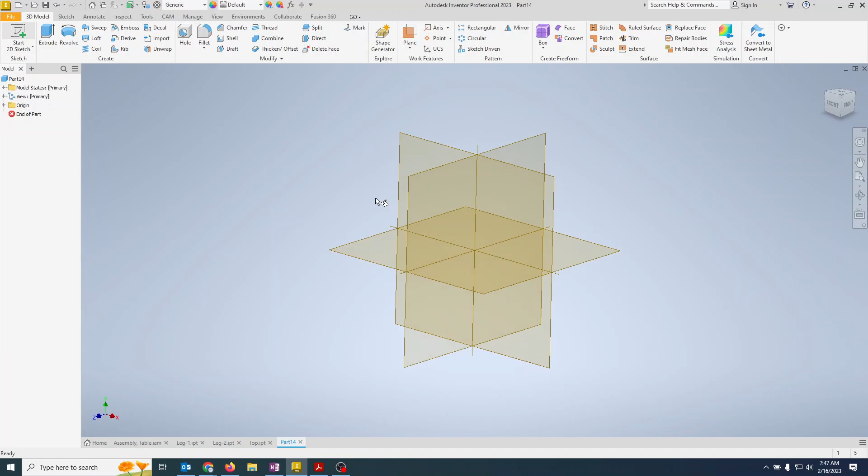start a 2D sketch. I'm going to do it on the XY plane, and I'm going to lay in my axis. All right, so I'm going to do it vertical. You could go out this way and make it look like the part, but I'm going to do that vertical, and I'm going to make that a construction line just so we don't get it confused with the regular lines. And then I'll come over here and I'm going to go up.

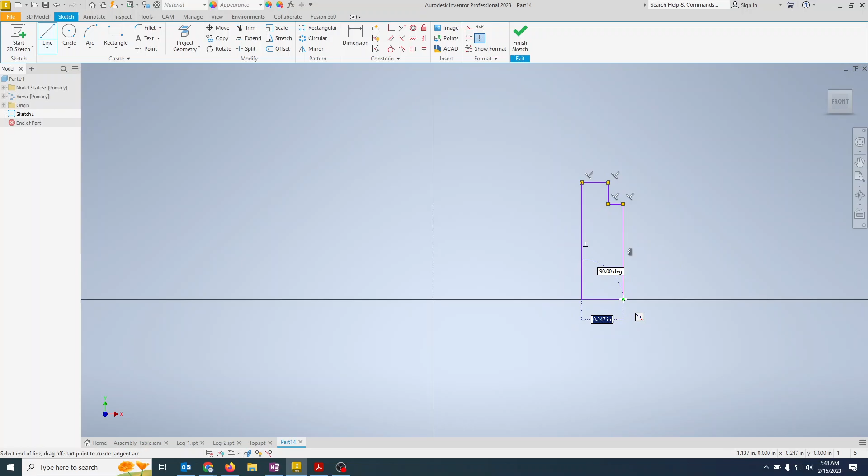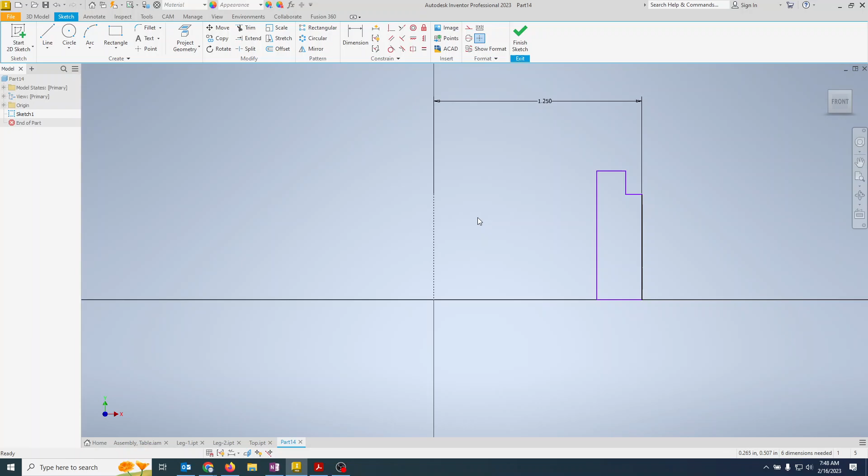If we go back and look at our part, the lip goes this direction and then up and then over and then back down and then back. Okay, so then all we have to do is start laying in our dimensions. So we have 2.5 to the outside, dimension from here to here. 2.5 divided by 2 because we're only going to the middle of the axis, and that is going to put it, oop, that is not right. 2.5 divided by 2, not 5. There we go. All right, so 1.25. You can do that shortcut if you don't want to do the math in your head.

And if we go back here, our inside dimension is 1.5. So dimension here to here, 1.5 divided by 2. That gives us 0.75. And then the outside is 2. Dimension, center line to the outside. And that is 1, because that is half of 2.

All right, now we just need to get our verticals in. And then we'll notice that this one is not attached to anything. So let's go ahead and say this is horizontal. This point is horizontal to this point, and that will bring those two down and lock it in place. And then we'll need a 1/4 inch and we'll need 1 1/4 inches.

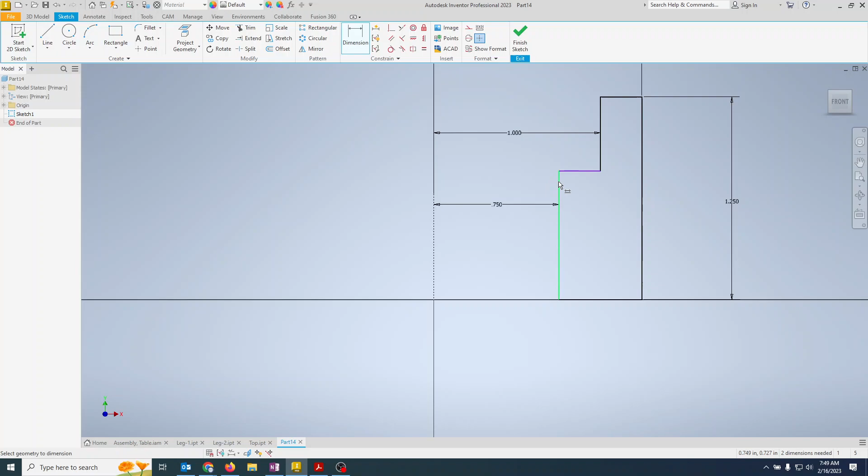All right, so this one is 1.25. Notice that that dragged up, so we're going to drag that up. And then we're going to say this is a 1/4 inch, 0.25. All right, double check all our things. So that's 1 1/4 inches. And I think that's got all the dimensions proper. Finish the sketch.

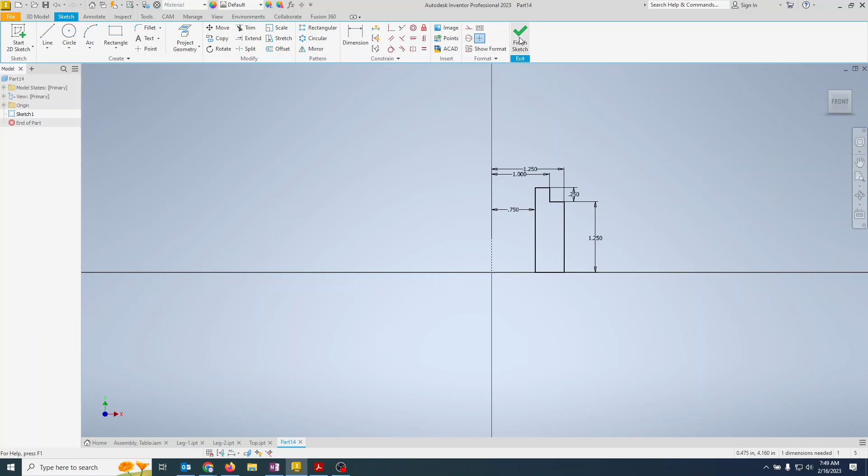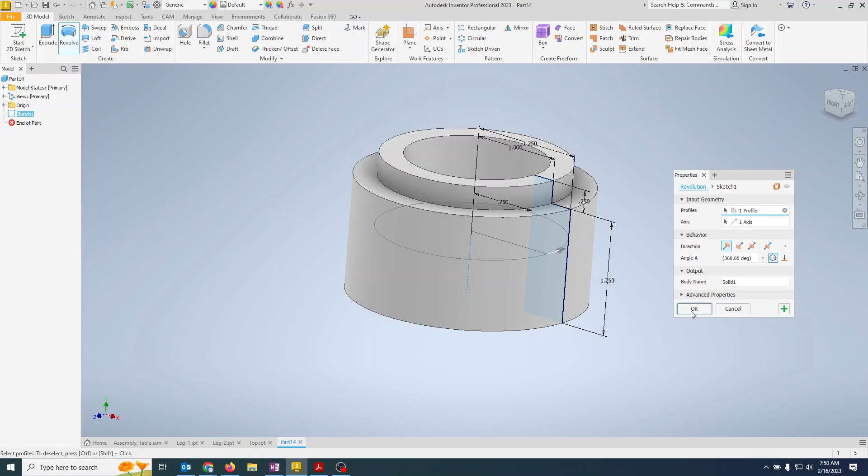Go to revolve. It automatically selects that because that is a closed shape. Hit my revolve. And that was the axis that I rotated around. Now I have a part. That was over on the other screen. Hit OK. Now I've got the part.

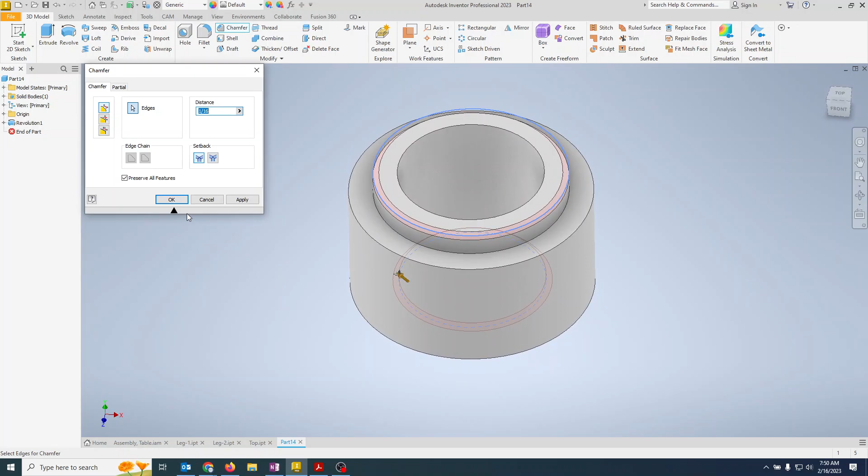Now the only other thing we need to put in is our chamfers, 45 degrees by 1/16 of an inch. And I have a chamfer on the outside of the part there, and then on the inside hole. All right, so we'll go up here to chamfer. We will use the 45, so this one just says 45. We want 1/16. And we will click there, and we will come under here and click there. And hit OK, and that part is done.

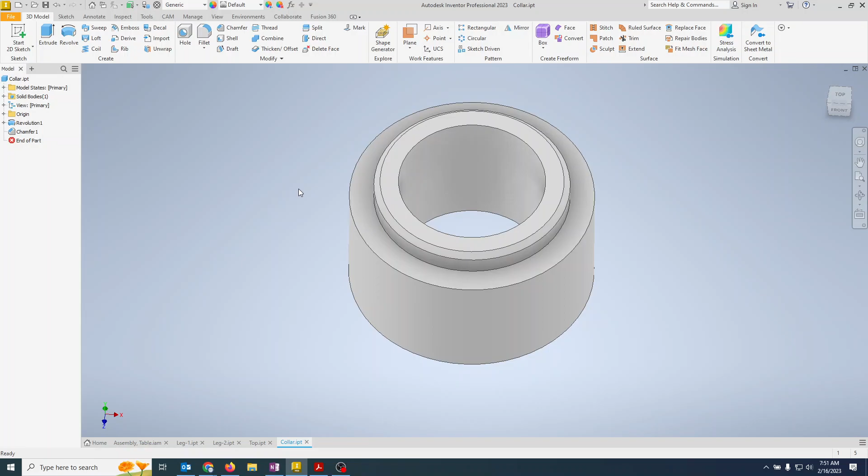All right, so we'll bounce back over. This is called the collar. File. Or actually, we'll just do it this way. Save. And we'll save this as COLLAR, collar. Save. Notice that I saved that in the Flatpak table. Yours is going to be wherever yours is, and you need to know where that is because I can't help you if you forget where you saved it. All right, that is part number 1.